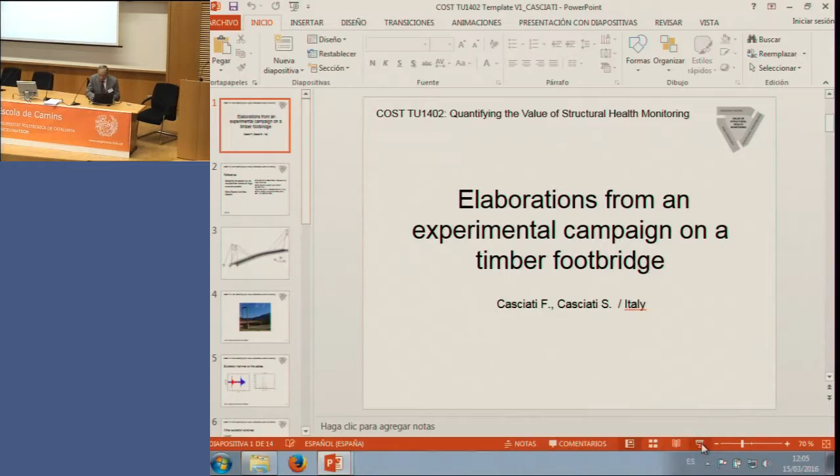Thank you, Mr. Chairman. When the chairman asked me for a title of the fact sheet, I was a little bit embarrassed because I was not in Istanbul, so I was not clear what a fact sheet was supposed to be.

So, the microphone? Yes. So, I stay seated. No, it's better then.

And so, the title contains two concepts. Elaboration, to show that we are looking to the future rather than to the past. And then there is a reference to an experimental campaign on a timber footbridge. Actually, we had two footbridges to which we had continuous access, and we can consider ourselves the owner of the collected data. So this gives us the possibility to repeat experiments and to consider them as our test field.

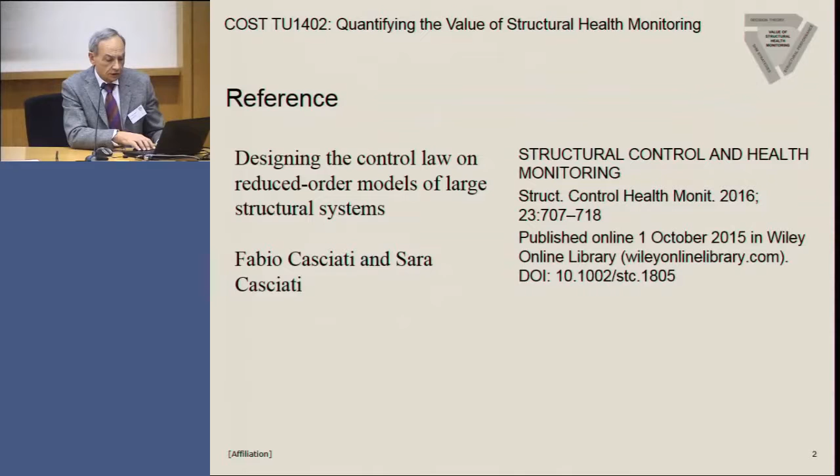It is very common that when you perform an experimental campaign, you are not the owner of the data, and so it's difficult to publish them and to repeat experiments and so on. In these cases, we had this possibility, and so I just wanted to give the reference. The paper was just published in the Journal of Structural Control and Health Monitoring in the April issue. So people interested in this campaign are addressed to this paper.

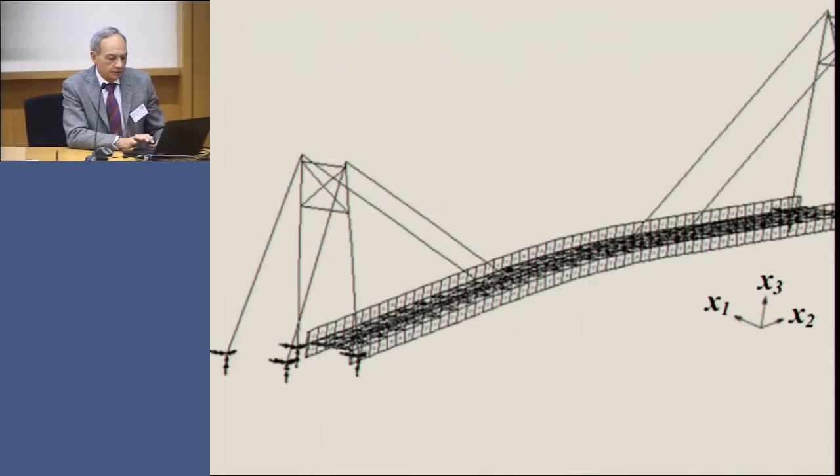One of the footbridges is this one. It looks like a cable-stayed bridge, but it's not cable-stayed because the stays are not cables but pipe elements. So we had an experiment on this, and the other one is a footbridge with a cable. It is 100 meters long, and as I said, we have continuous access.

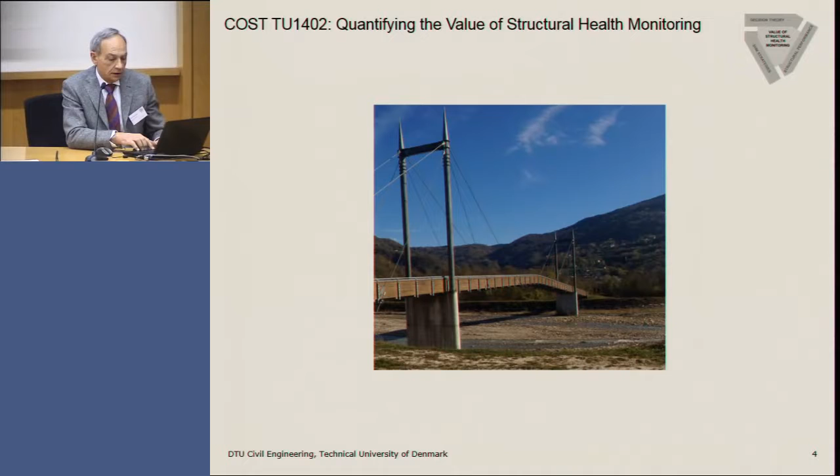Okay. This is the past, and we obtained these results with standard accelerometers, with technology that is good in terms of wireless, power harvesting, real-time communication, and so on. And from what I have seen this morning, in the other applications people were using strain gauges, most of them fiber grating, and there are other techniques that seem to be consolidated, such as vision-based, laser scanner, radar scanner. All these could be considered consolidated.

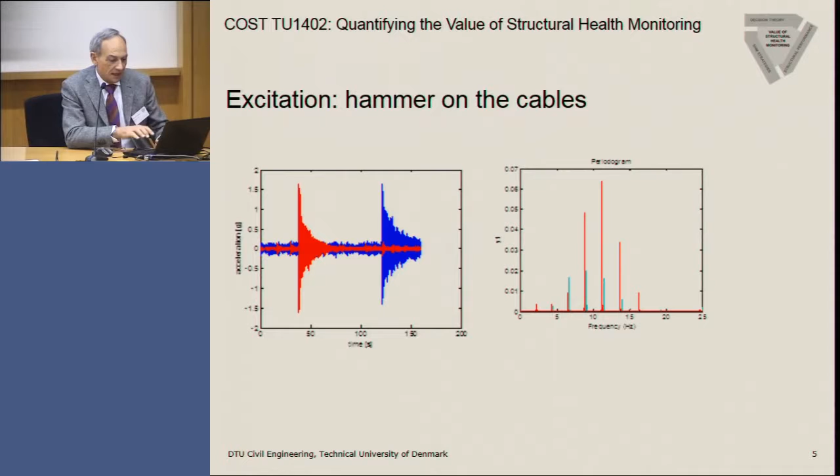But I would like to present today something that occurred to me in a parallel project, and from that I started a new, let me say, wish of research. Let me conclude about the footbridge. Of course, the main loadings are wind or pedestrians walking and running. Cunha already gave us some idea.

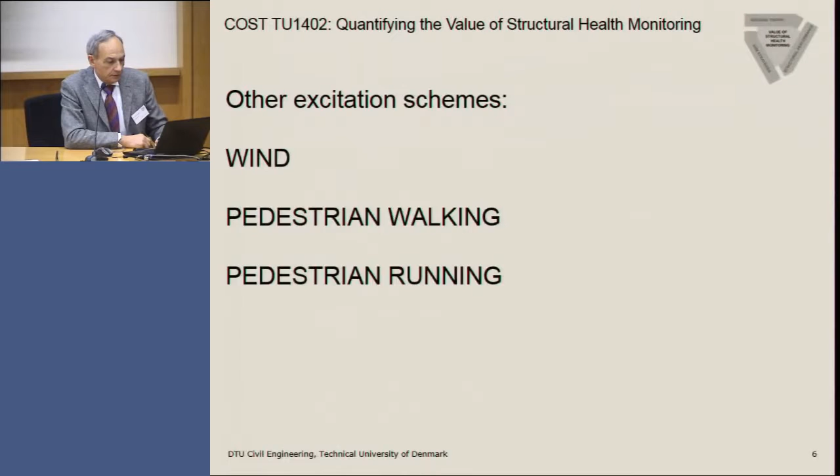Before entering the concept, I would like just to say that because this is a European project, it is important to speak a little bit about the Galileo delay. Today is 2016. I remember that the first date for Galileo was 2012, and now it is planned for 2020. So we Europeans are in a period in which we have a good challenge for the future, and unfortunately, a continuous delay, a gap that prevents us from using our own technology.

We addressed this topic by using a simulator. I just want to make you aware that there is the possibility to use a simulator in which you can simulate the signal produced by Galileo, so you can produce your own device exactly as it will be used tomorrow when Galileo is working. And I wanted just to give you an example, but before, sorry, the slide was prepared for another, oh, sorry.

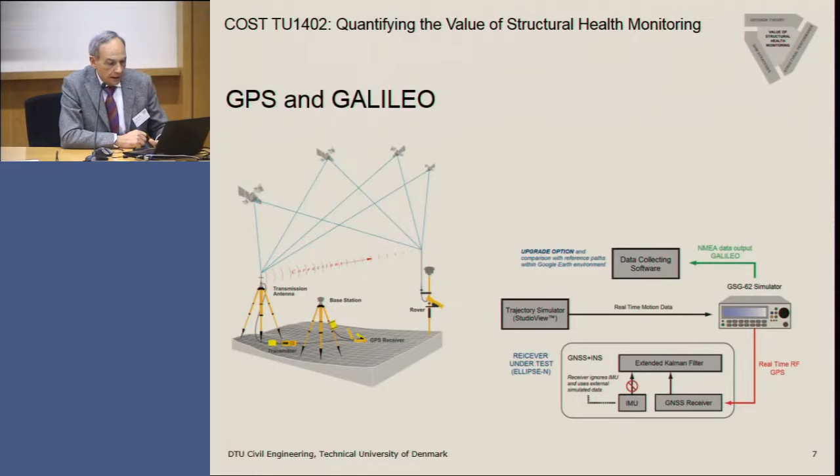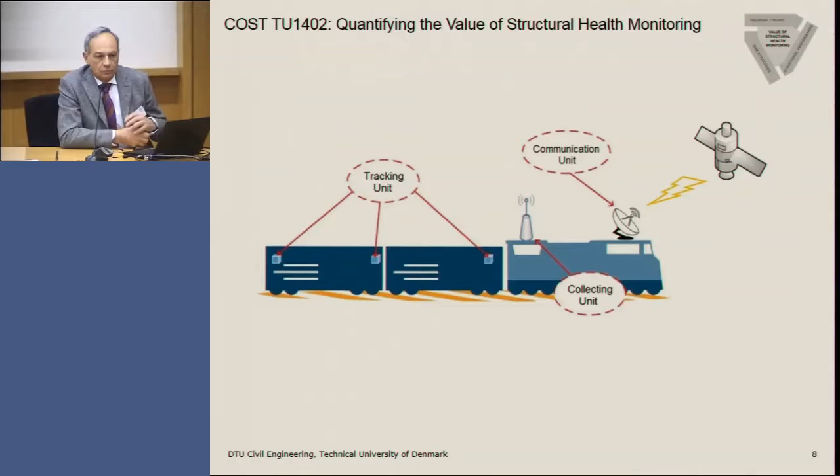The reason I met this problem is that I am involved in a project that has nothing to do with our world. It is security, and it is regarding equipping trains, trucks, and so on with a system monitoring their position in view of security issues, mainly in order to monitor these even up to 24 hours after a catastrophic event. So you have to provide energy, real-time communication, you cannot rely on internet and so on.

The device is something that I show on your right, and this is the starting point of my communication, because all of you presented your contribution assuming that the data were suitable. But the data are collected by devices. These devices are in evolution. And one of the main important evolutions of a sensor like the red box here is that it includes a lot of software, because it is a system coming with GPS information, but it also exploits internal inertial sensors, and not only one, but mounted inside the box,

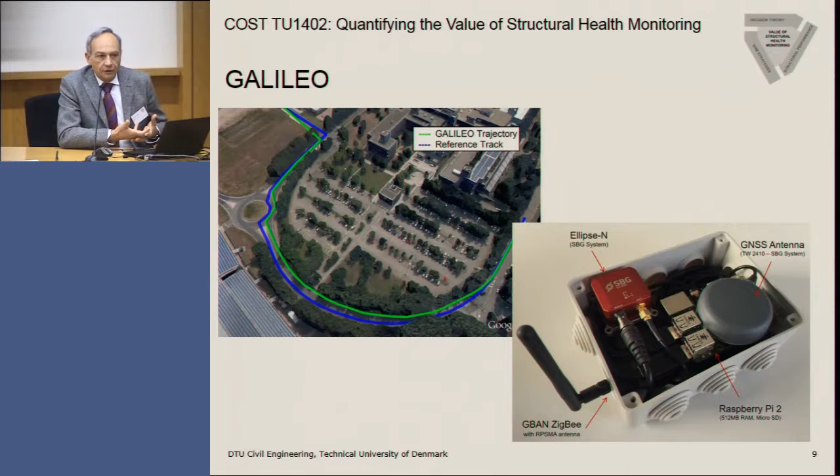And the idea that we had is to use these devices on the footbridges I showed you at the beginning, and the results will be made available at the Bilbao conference, where most of us will meet next July.

Essentially, going to the scientific technical term, I check the chairman is not looking at me in too bad a way, but I still have 2 minutes, I think.

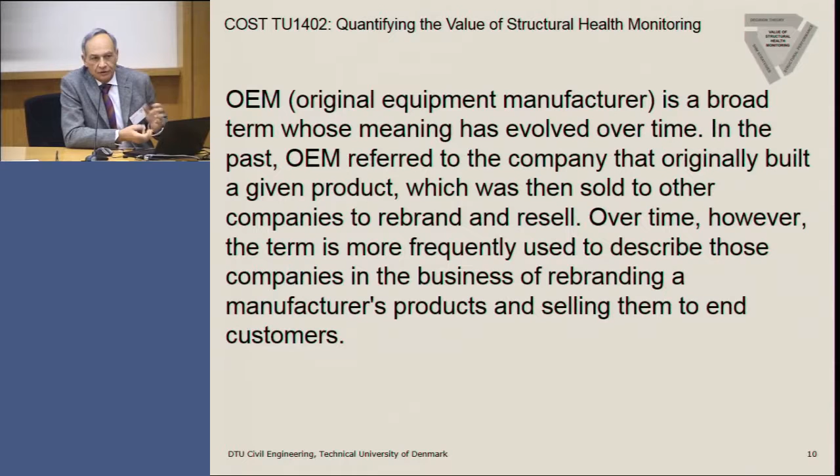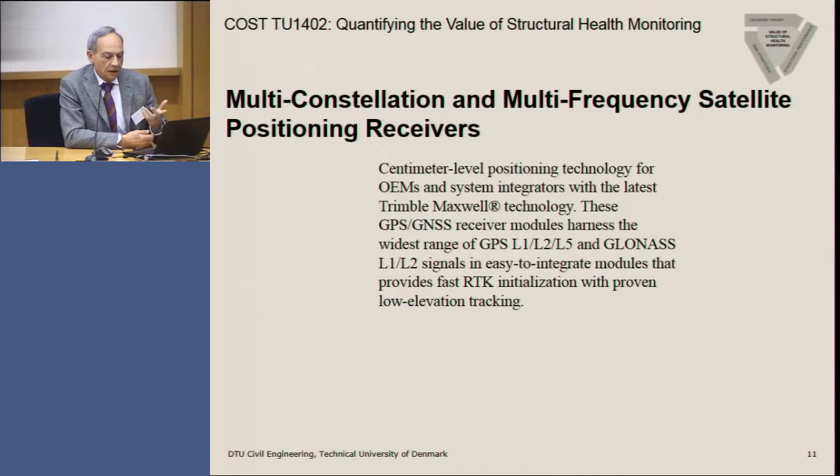The term is OEM. OEM stands for Original Equipment Manufacturer, and is something that the producer offers on the market according to this description. But essentially, what they are producing is a sort of multi-constellation, in the sense that they work with GPS, with Galileo, and so on, and multi-frequency satellite positioning receivers, which already mount inertial sensors. So they give exactly the same information that was illustrated before. And if you go to a web page, you can find something like this. This is the offer of the market.

And in my opinion, we as civil engineers have to understand if we are interested in using this kind of device or not. So let me summarize. They offer us the position from the GPS, and most of you will think, okay, that is fine for horizontal. Be careful. They also start to give you information on the vertical. So when I mount it on a cable, I would like to see exactly what is the added information I receive by using this

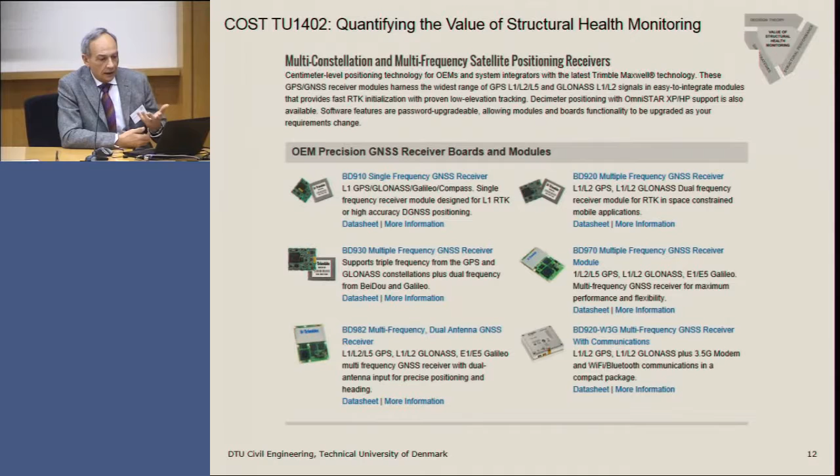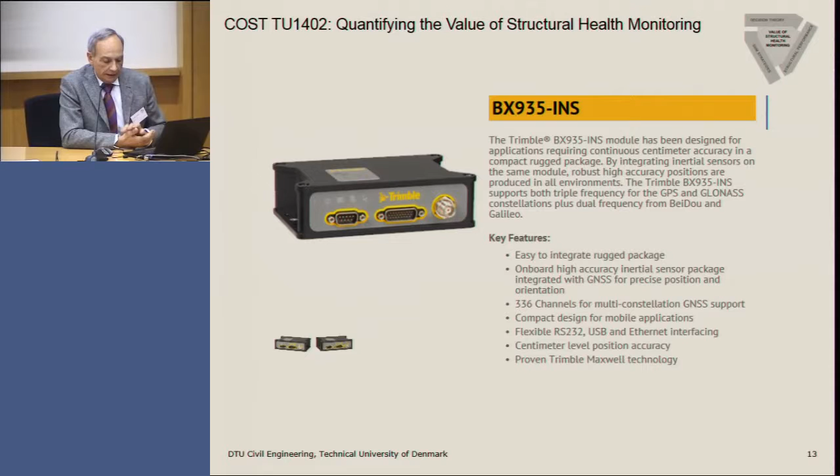3-direction positioning. But also there is the filtering by the installed software, that could be very interesting or very dangerous for the application. And also there is the digital issue, which is not a minor issue and must be considered. Well, this is the device we are testing. For the moment, we are just waiting for better weather. It's still cold for going in the field. In April, we will perform the test on the footbridge. As I said, we will report in Bilbao.

Conclusion. Having the availability of a test field represented by a testing footbridge 100 meters long, and having access to OEM technology with their integrated devices, the problem is to discover the role of the integrated devices in this. The goal is to exploit the offer by enhancing the potential of the new market offer.